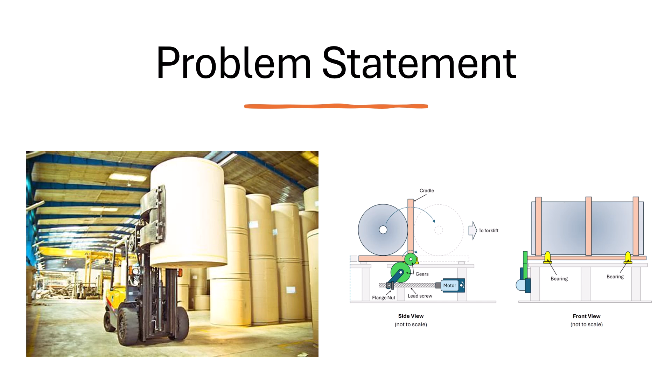The figures above show a front and side view of our design and the general motion of the system. Working in unison, the lead screw, gear train, and bearings are able to rotate the cradle 90 degrees.

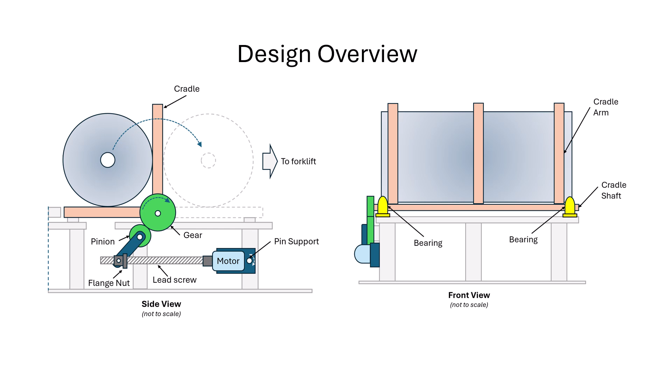To analyze how much torque is needed to rotate the roll of paper, the worst case scenario is considered. The instant the roll is lifted from rest, it induces the largest torque in the system. Calculating its weight and distance from the rotating shaft, the maximum torque was found to be 3,870.58 Newton meters. This value can be used to analyze the three facets of our design.

The function of the lead screw is to provide a necessary amount of torque to the crank arm. Since the crank arm attaches to the pinion, it requires a constant torque. The motor rotates the lead screw such that the nut attached to the crank arm translates in the direction indicated.

Also, the motor and lead screw pivot together behind the motor. This allows the rigidity of the crank arm to be accounted for in its rotation. The layout of this portion of the mechanism let us assume that the start and end position of the crank arm are symmetrical about the y-axis.

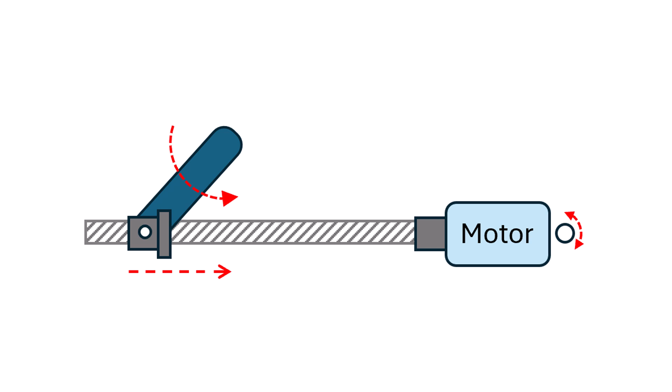Therefore, the lead screw and motor will begin and end in the same horizontal orientation. Also, a length of 0.5 meters was selected for the crank arm.

Since we know that the cradle needs to rotate 90 degrees in the allotted 45 seconds, we know the larger gear has to have a rotational speed of 2 degrees per second in the shown direction. Additionally, it has to transmit the max torque to the shaft.

By working backwards and using a gear ratio with 97% efficiency, we're able to find the torque that needs to be exerted on the pinion by the crank arm and the speed of the pinion. Additionally, the pinion will rotate a total of 135 degrees through one rotation of the cradle.

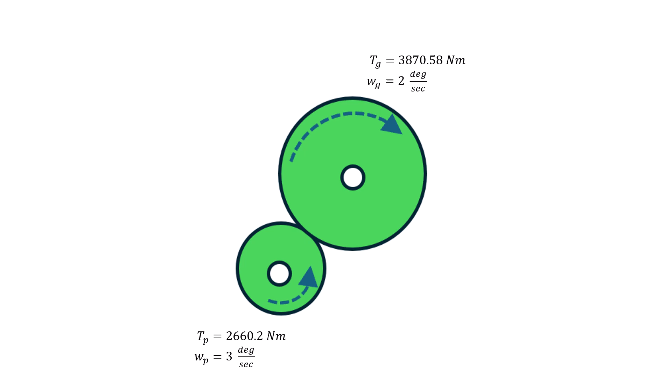It is important to note that the pinion is driving the larger gear, exerting a large force to achieve the desired torque that will need to be supported by the bearings. To maintain equilibrium, bearings were strategically placed along the rotating shaft on the outside of the cradle to support the forces from the gears and the weight of the paper roll.

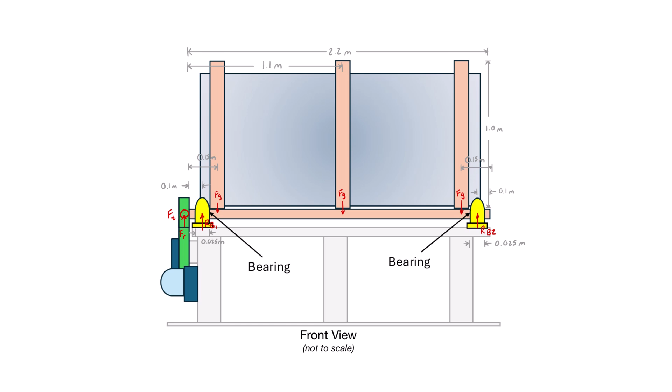While in the maximum torque position, the gravitational force of the roll is distributed equally amongst the three arms it sits on. Our technical analysis began with analyzing the bearings.

To understand the load of the bearings, we first analyzed the loading on the shaft in the maximum torque position. The loading force is comprised of gravitational forces from the cradle shaft, 6 arms, and paper roll. The torque on the shaft due to loading is only comprised of the gravitational force from the roll and the 3 arms supporting the roll after the mechanism is activated.

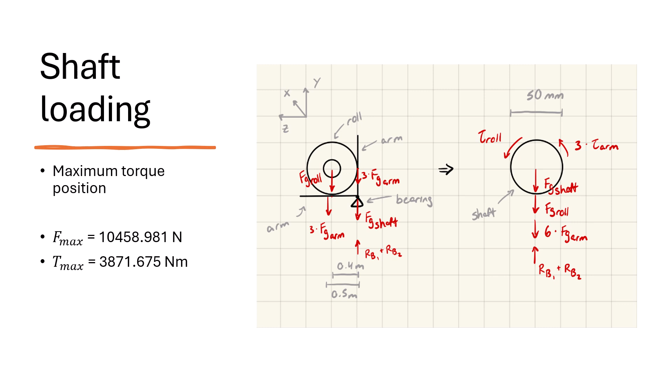Using our assumptions, we calculated the max force and max torque as seen on the slide. To calculate the load on the bearings, we modeled the shaft as a simply supported beam. As previously mentioned, the maximum torque position disperses the weight of the roll amongst the 3 arms.

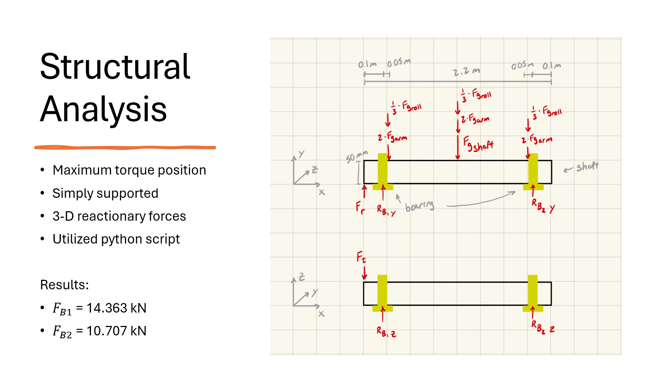A second model was needed to consider the tangential force placed on the shaft from the gear. Due to the bearing providing forces in more than one direction, we used Pythagorean's theorem to find the total force magnitude. A Python script was utilized to help iteration with various gear forces.

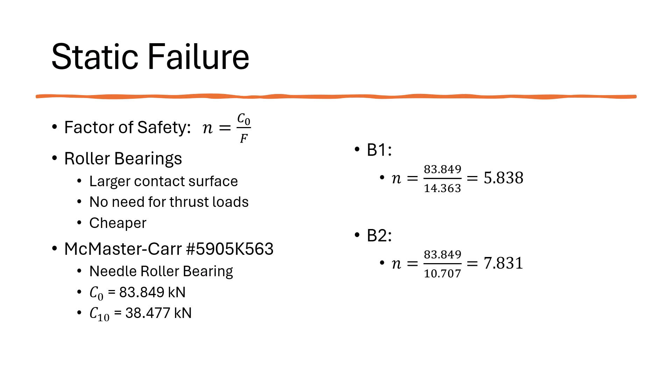With the load of each bearing known, we then analyzed the static failure and its factor of safety. In choosing bearings, the high radial load and non-existent thrust load led us to select roller bearings. Using the equation on the slide and the specs from our selected bearing, the factor of safety for each bearing is well above the threshold of 2.

Next, we analyzed bearing life to ensure it would meet the requirements of the required 312,000 revolutions. To meet the factor of safety requirements, we analyzed the bearing to a 99.6% reliability, which resulted in a 99.2% system reliability. Using the dynamic load value of our bearing, the calculated life of each bearing was well over 8 times the amount we needed.

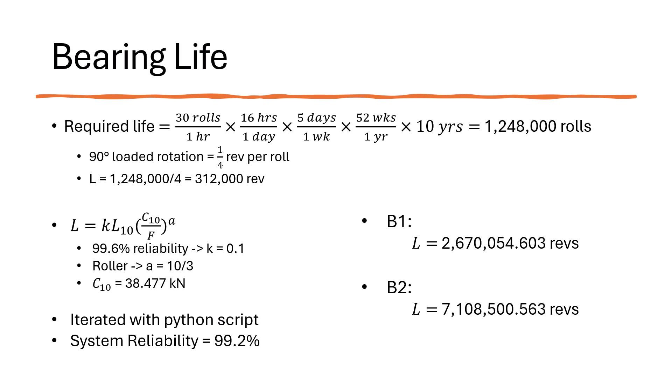The same Python script was also used to help iterate required static and dynamic load values needed to aid bearing selection. Next, we'll talk about the process of choosing the gears.

3 main factors had to be considered during this process. First was the gear ratio, which will affect the speed and torque transfer. Next is the size of the gear, which directly impacts the lead screw displacement and the tangential forces between the gears.

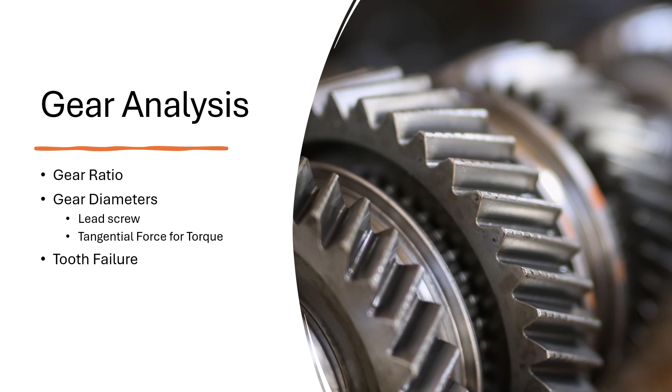Finally, the strength of the gear, where the tooth stress is analyzed. The final gears chosen for the system had a module of 10 millimeters and had 30 and 45 teeth respectively. Our setup utilizes the pinion being connected to the crank arm, creating a gear ratio setup that allows for better torque transfer to the rotating system.

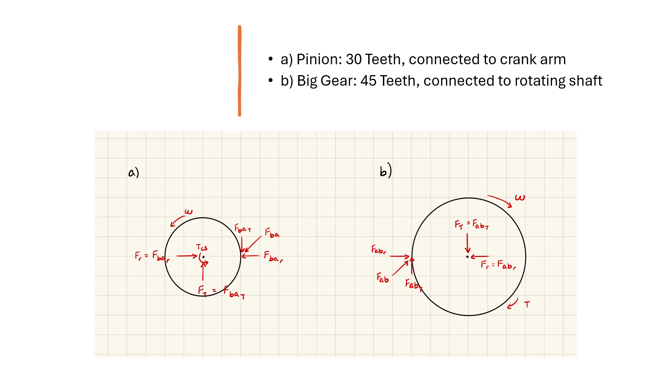A large number of teeth had to be chosen to limit the angular displacement through one rotation. Additionally, the gear connecting to the rotating shaft had to apply a large torque to rotate the paper roll. This torque is created by the tangential forces between the gears shown in the free body diagram. In order for this force to be minimized, and thus the reaction force in the bearings to not reach a failing level, the diameter of the gear had to be large as well. This led to the conclusion of finding gears with a large module.

The primary failure mode of meshing gears is tooth failure. High forces need to be applied to individual teeth to create torque and motion of a gear. In this case, 3 iterations were run to find an acceptable gear size. Both 1 and 5 module gears with their desired gear ratio ended with factors of safety less than 2.

By increasing to a module of 10, however, the tangential force, WT, decreased, while denominator terms of face width, F, and module M increased. This led to the pinion and gear having a factor of safety due to the Lewis bending equation of 5.78 and 6.44 respectively.

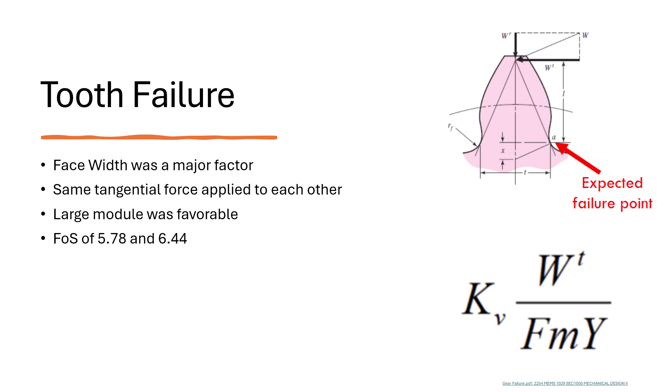Now we'll discuss the power screw analysis. This portion is made up of 3 parts: geometry, thread failure, and motor power. To fully understand the motion of the lead screw throughout the machine's activation period, we looked at the beginning, middle, and end of the process.

We knew that the pinion attached to the crank arm rotates at pi over 60 radians. Using this, we determined that the angle between the lead screw and the crank arm at the beginning is 22.5 degrees and that it is the same at the end. Therefore, we calculated that the necessary force of the lead screw is 13,902.85 newtons at both of these points.

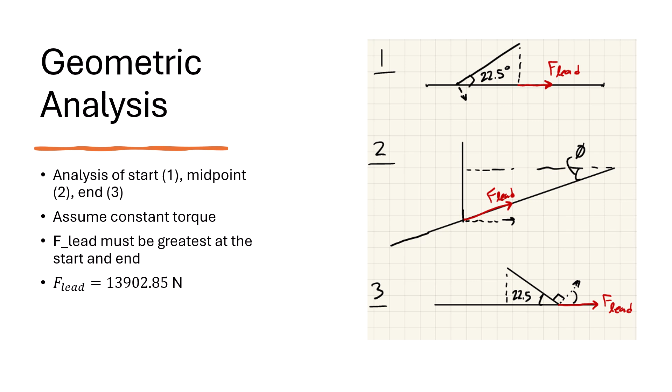To analyze the force of the lead screw at the midpoint, we used the known length of the crank arm, 0.5 meters, and the angle, 22.5 degrees, to determine that the pivot angle, phi, equals 19.17 degrees. Knowing this, we calculated that the force was less than it was at the start and the end, so the larger force is selected. Thus, the lead force is equal to 13,902.85 newtons.

To ensure the structural integrity of the lead screw, adequate dimensions needed to be selected. A factor of safety greater than 2 provides a reliable assurance that the screw will not fail. Also, steel was chosen as material for the screw and nut due to its strength, cost, and material properties.

The allowable axial stress was set to be half the tabulated maximum axial stress for a class 4.6 screw. The equation was then rearranged to find the minimum minor diameter, which was used to select the rest of the dimensions. The chosen major diameter is 16 millimeters, mean diameter is 14.5 millimeters, and pitch is 3 millimeters. We then used these dimensions in the bearing stress equation to determine the number of threads required, which is 1.

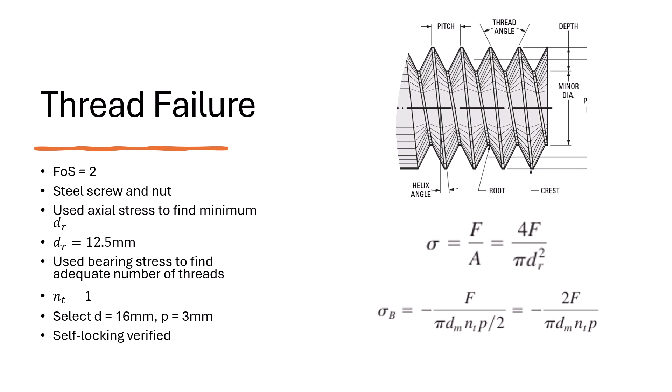To find the power, we needed the angular velocity of the screw. This was found by taking the known angular velocity of the pinion and multiplying it by the length of the crank arm, 0.5 meters. This yielded the linear velocity of the crank arm. Knowing this, we could use the equation in the book to find the angular velocity of the screw. Therefore, since we knew the angular velocity and torque, we could find the power supplied by the motor, 2,784.27 watts.

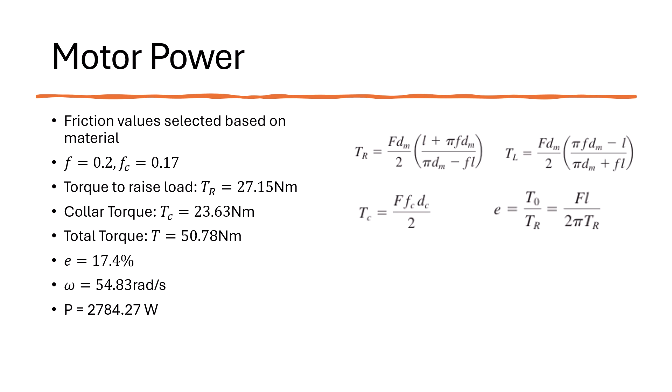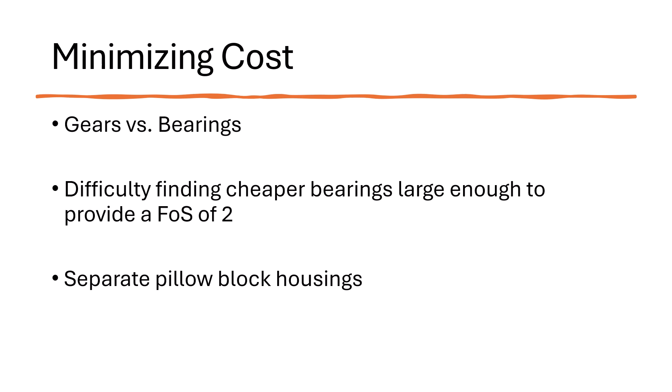When looking for bearing housings, several retailers offered pillow blocks with bearings already inserted. We chose to use separate bearings and housings to reduce the cost, but we were ultimately unable to find pillow blocks large enough to fit these bearings on commercial retailer sites. The estimated cost for each pillow block came out to be about $45 after looking at the linear nature of cost versus inner diameter of the housings on McMaster-Carr.

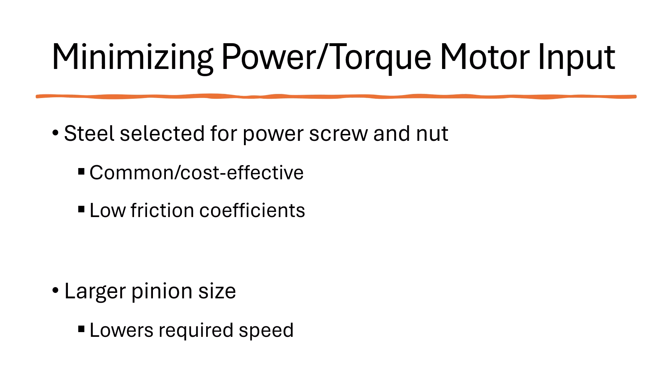To minimize the power and torque input to the motor, steel was selected for the lead screw and nut material. This provides the lowest friction coefficients while remaining cost effective. Also, the pinion size was increased, which decreased the amount of angular rotation of the crank arm. This decreased the speed at which the lead screw had to rotate, which lowered the power.

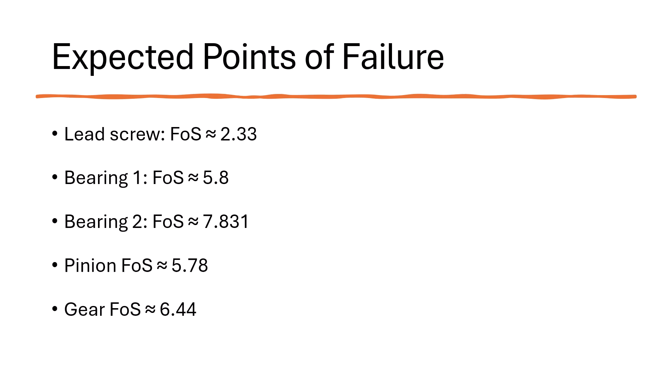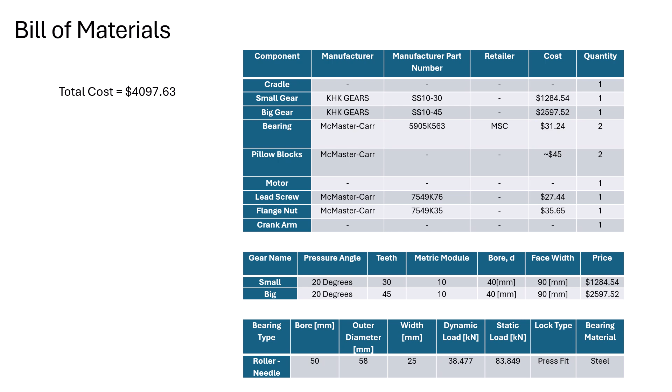Our final design came out to a total cost of $4,097.63. All of our calculations, coding scripts, and resources used are linked below.